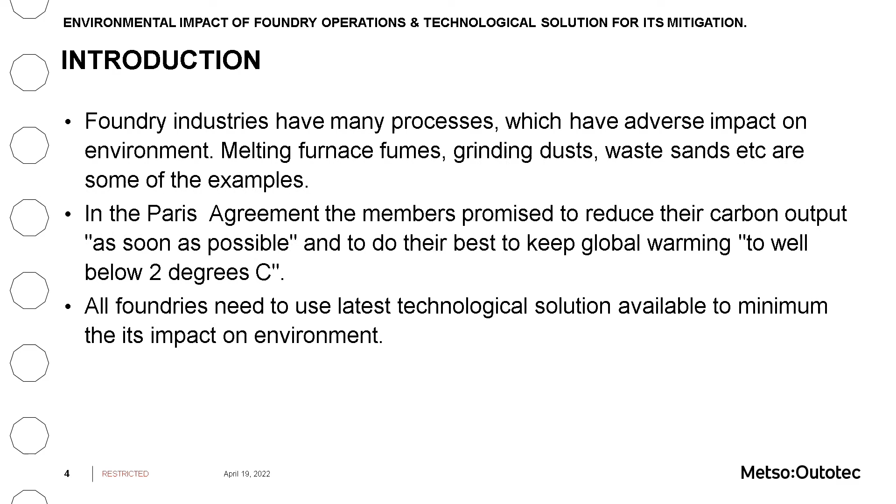So let's start with the introduction. We are all aware that the foundry industry has many processes, starting from pattern making to casting dispatch, and all these processes involve some impact on the environment. For example, melting furnace fumes, grinding dust, as well as when we dump used sand, that creates pollution in the environment. The Paris Agreement was held a few years ago, and during that, all members committed to reduce their carbon output as soon as possible. Apart from that, they also committed to keep global warming well below 2 degrees. So to achieve this target, what the foundry industry can do is use the latest technological solutions available in the market.

So let's start with what are the processes which cause detrimental impact on the environment. One of the processes is molding and core making. In green sand molding, a lot of dust is generated, and in resin bonded processes, a variety of resins and catalysts are used. When we dump that sand, it is harmful for our motherland, so it creates soil pollution.

After the molding process, if we talk about the melting process, we are all aware that this is a very energy intensive process, and a lot of energy is required to melt raw materials and scrap. During the melting process itself, a huge amount of fumes are generated. In addition, before melting, when we do scrap cutting by thermal means, that also creates a tremendous amount of fumes, which need to be captured by some means to avoid contamination to the environment.

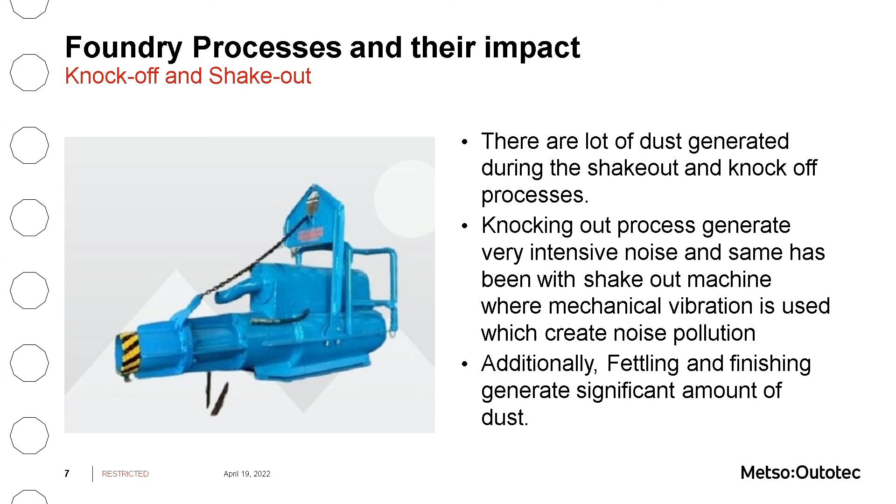Moving forward, knockout and shakeout processes also create lots of dust in the foundry, and we are all aware that the environment at the knockout and shakeout area generates very intensive noise. The same happens with machines where mechanical vibration is used, which also creates noise pollution. Apart from both these processes, the fettling and finishing process also generates a significant amount of dust.

Also, the pneumatic transfer of the sand also creates dust.

If we talk about fumes, obviously the scrap cutting activity as well as the melting activity also generate fumes. Apart from that, when we transfer the mold and pour the casting, fumes are also created. The third one is odor.

It is generated in casting and mold cooling, as well as during sand mixing. During the melting activity and spraying and coating activity, odor is also generated.

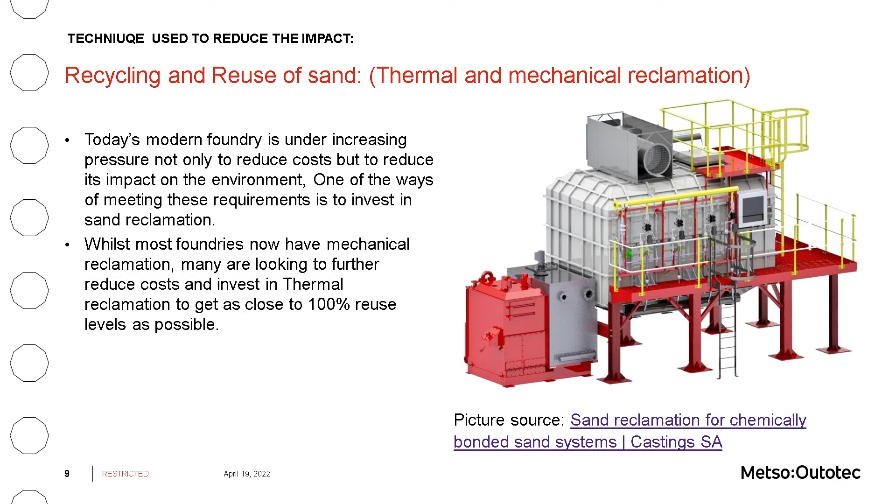When we use sand, first of all is recycling and reuse of the molding sand. In today's modern foundry there is tremendous pressure, not only for reducing cost, but the laws related to environment are getting very strict, and that triggers the foundry to invest in reclamation of the sand.

Nowadays, most foundries have mechanical reclamation, but now foundries can use the thermal reclamation unit to reuse the maximum amount of sand in the foundry, so they can minimize the use of natural resources and reuse it very well.

In the thermal reclamation process of sand, most of the binder and all organic materials are removed by the oxidation process in the chamber. First, the sand coming from the mechanical reclamation plant passes through the cleaning tower, and at that time most of the metallic particles are removed before it enters the thermal reclamation unit.

The thermal reclamation system itself is a fluidized bed design with a gas and air mixture, providing the fluidized medium and igniting the sand bed via gas nozzle. The typical thermal reclamation system uses natural gas or LPG, and it operates at different temperatures depending on the binder used.

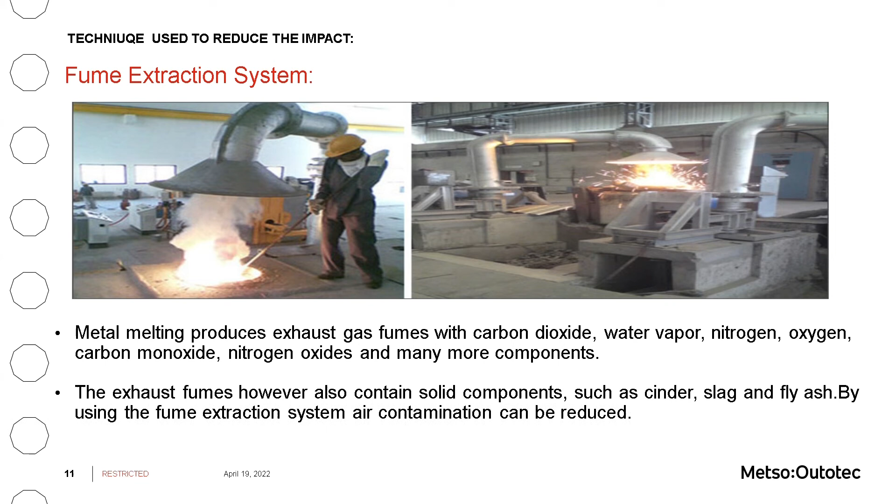Apart from that, very fine particles of solid components are also generated during the melting process itself, and that needs to be captured by any method or technological solution available in the market. So nowadays, most furnaces, if you buy a new furnace, are equipped with a removable lid, and that furnace operates in two modes.

First, when the lid is closed, most of the melting happens at that time, and the furnace operates at minimum exhaust power, with that lid removable. So when that lid is open, the furnace operates at maximum exhaust power, because at that time most of the fumes need to be captured.

Here, on the right hand side, is the picture of the fume extraction system we have installed in our Vadodara foundry.

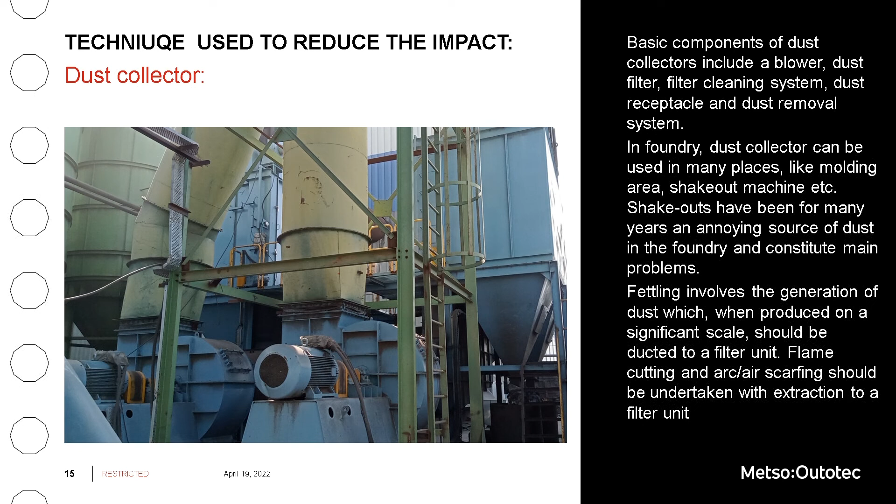In foundries, dust collectors can be used at many places like molding area, reclamation unit, mixer area, shakeout area. We can also put dust collectors at the fettling area for grinding dust control. For fume generation at gouging and welding areas, we can provide fume extraction systems. Portable fume extractors are available in the market, so we can reduce fume as well as dust using this technique.

Another area of concern is water pollution. Many chemical industries as well as foundries generate lots of water effluent, so we can treat our water effluent using two major parts of treatment plant: the effluent treatment plant and sewage treatment plant.

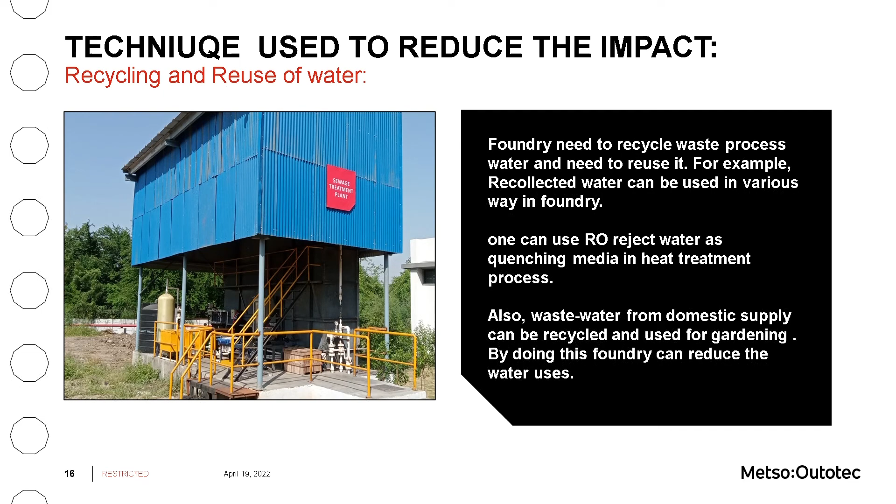At Foundry, we have a zero water pollution policy. We installed an STP sewage treatment plant to reduce and recycle domestic water generated from the canteen, water bath area, and toilet area.

First water is collected at soak pits, and then by gravity it comes to the STP plant, where we have primary, secondary and tertiary treatment. After that, we recycle our water for development of garden and green belt.

We can also use RO reject water, which has high TDS, in our quenching media at the heat treatment process. Also wastewater from domestic supply can be recycled and used for gardening, and by doing this we can reduce water usage as well as pollution.

Many other new technologies are in the market, like energy efficient equipment with latest technology that foundries need to adopt to reduce energy consumption, which will ultimately reduce the impact on environment. For example, there are high efficiency burners available for complete combustion of LPG as well as PNG gases in the heat treatment area. In addition, some foundries use refractory coating on heat treatment furnace lining.

We have also planned to install a 2 megawatt solar system on our production shed. Apart from this, we can use LED lighting instead of normal lighting, which will also reduce our energy consumption, and indirectly contribute to minimizing the CO2 emissions generated at various power plants and in the electrical sector.

Apart from this, we commonly use the concept of rainwater harvesting to limit water usage.

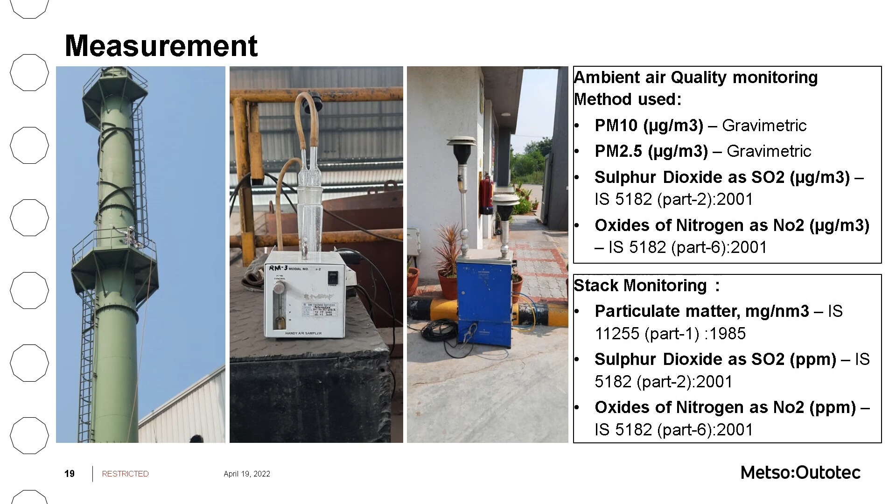We installed various technologies, but if we cannot measure the pollution factors, we cannot minimize the pollution source. So at Metso Outotec, we monitor ambient air quality, following methods for PM10, PM2.5, sulfur dioxide, and oxides of nitrogen.

At stack monitoring, we also monitor particulate matter, sulfur dioxide, and oxides of nitrogen. Also for the sewage treatment plant, which we use for the gardening area, we have to monitor biological oxygen demand, total suspended solids, pH, and residual chlorine to minimize the environmental impact on ground as well as biota.

Workplace monitoring is also done, in which we monitor total dust, sulfur dioxide, and nitrous oxide. Drinking water as well as noise monitoring are also done as per this standard.

Mr. Darshan, last 2-3 minutes. Yes, sir, so we can conclude that...

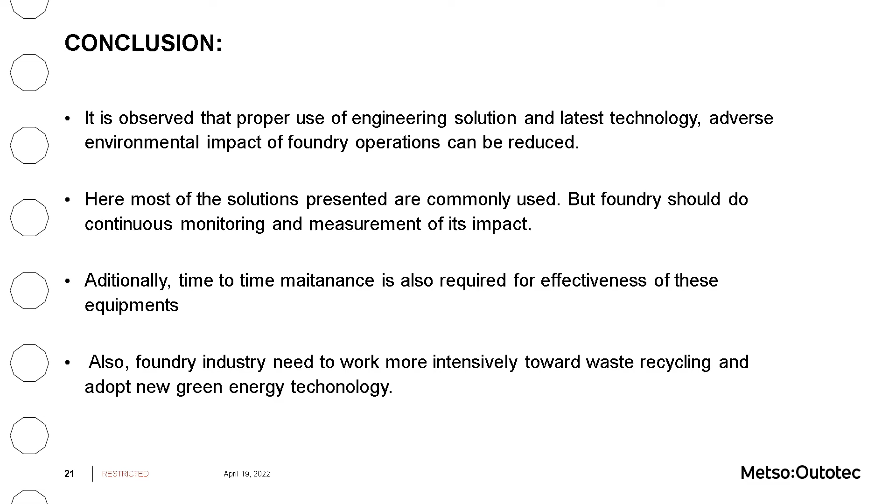It is observed that with proper use of engineering solutions and the latest technology, adverse environmental impact of foundry operations can be reduced. Most of the solutions presented here are very commonly used in almost all new foundries, but foundries should do continuous monitoring and measurement to reduce their impact on the environment.

Additionally, time-to-time maintenance and preventive maintenance is required for effectiveness of this equipment and technology. Also, the foundry industry needs to work more intensively towards waste recycling and adopt new green energy technology like solar panels. Thank you very much.

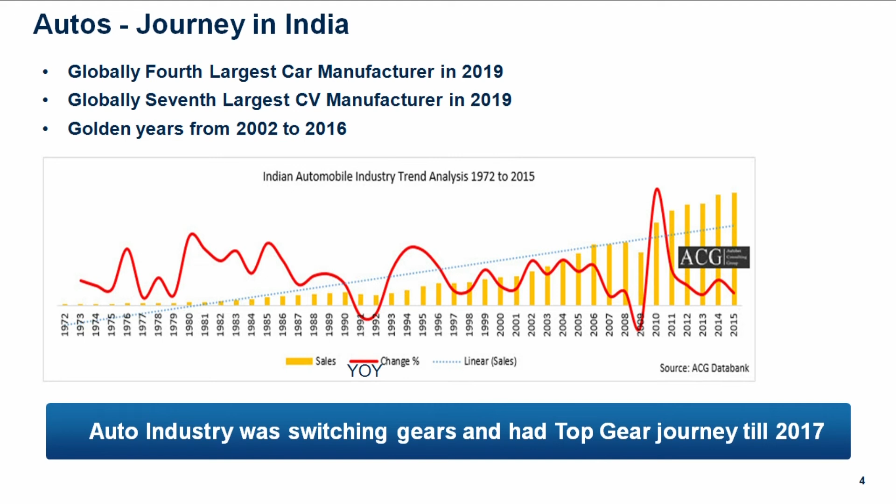This is very interesting. Auto industry has seen ups and downs since it started. But 2016 and 2017, we had a golden era where you see upscales. And if you look at the linear sales, the industry is progressing in a positive direction. Research from Counterpoint suggests we had a CAGR low, but if you look at the third best year in 2021, after 16 and 19 was 21, over 3 million units of passenger vehicles were sold. So again, a great future ahead.

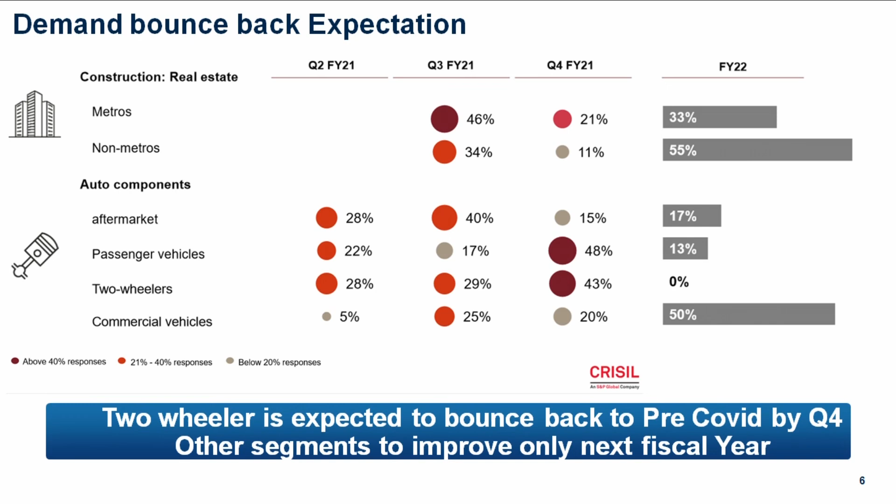This is from CRISIL. The way you read this chart is, this was a survey done on what is the customer expectation and what do they think about demand bouncing back, and this was done back around a year back. So for construction and real estate, the circle indicates 40%, the dark red indicates above 40% of responses saying that, 46%, that demand will bounce back. 21% to 40% of responses say Q4 2021 it will bounce back, and 33% said it will bounce back in 2022.

Look carefully at the auto components, commercial vehicles, 50% demand will bounce back in 2022, and passenger vehicles, financial year 2021, 48%. And we saw that 3 million vehicles sold, right? So the remaining 30% will grow. Two-wheeler industry had a great turnaround in 2021.

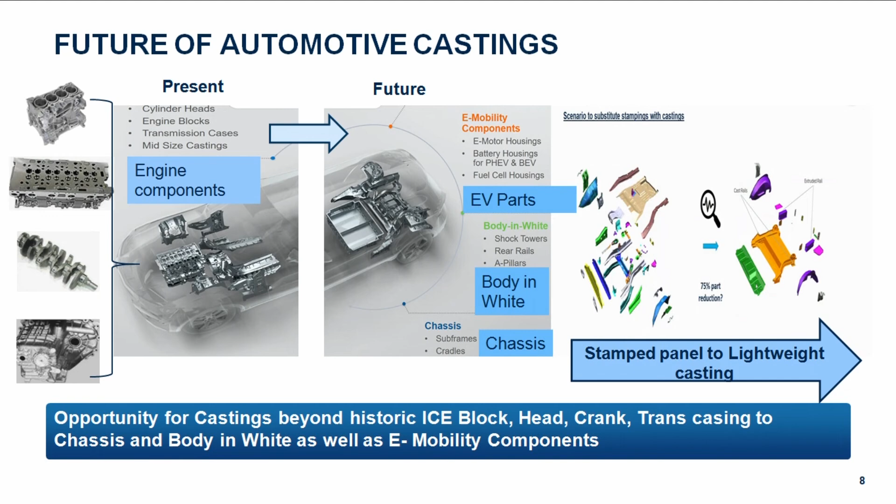What's the future? Casting industry for automobile, when one speaks, it's about 4 components historically: head, block, crank, and gear case housing. But from present to future, if you look at electrical vehicles, there's a significant increase in aluminum die casting, high precision aluminum die casting. It includes e-motor housing, battery housing for plug-in hybrid and battery electrical vehicles, and fuel cell housings. Interestingly, a lot of body components where we currently see sheet metal are also getting changed to complete aluminum die casting. So in body-in-white, the shock absorber mountings, the rear rails, A-pillars - from the driver's seat, left and right A-pillar, B-pillar and C-pillar - the full subframes and the cradles where batteries and the trans casing are mounted are also getting developed towards lightweight casting. And this is a significant step change from where the casting industry is, to get ready for the future. Because a lot of talks are about, if internal combustion engines get phased out, what's the future of casting? But this is the future.

Some examples of high precision aluminum die castings: the right-hand side picture is about the front cross member, where the powertrain component sits, and the shock absorber tower, and the rails. These are all built with aluminum die casting. So you don't have to manage complexity, don't have to manage welding parameters, etc. And it is lightweight, which improves the emission as well as the strength to weight ratio and fuel efficiencies.

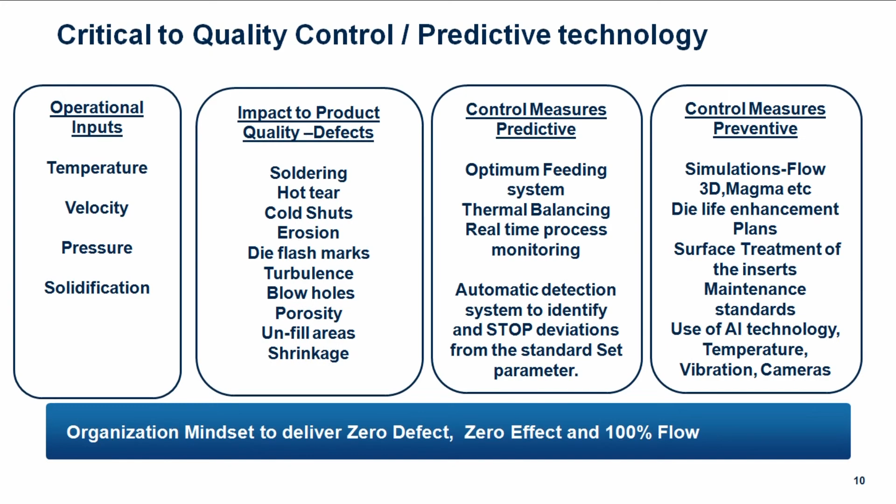To deliver this, what are the critical to quality parameters? If you look at input in the foundry industry, temperature, velocity, pressure, and solidification - these are the critical input parameters. When we talk about SIPOC, it's all about how you measure your input so that your output is predicted, good or bad. And when bad is predicted, we correct so the customer doesn't get bad quality. If it is not managed well, it impacts product quality - defects like hot tears, cold shuts, these are all foundry terms, so I'm not getting into detail. And it costs a lot to the foundry as well as the OEM. Control measures we can put in place are feeding systems, thermal balancing, real-time process monitoring, AI technologies, and automatic detection of process parameters. So if anything goes wrong outside the control limit, the process stops producing bad quality parts.

What can be done at pre-advanced stages is simulation, flow analysis, Magma, some die enhancement, surface treatment, AI cameras, vibration monitoring, heat temperature monitoring, etc. When things go wrong, it's a major cost to the company, including OEM as well as the foundry, and it causes recalls, bad brand image, etc. So if we have to get out of this, I think the way is to focus on input and have a very solid quality process control.

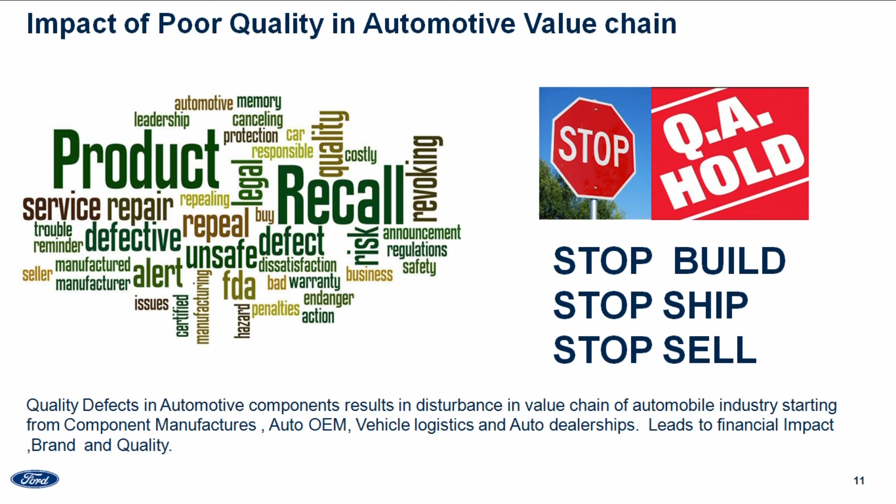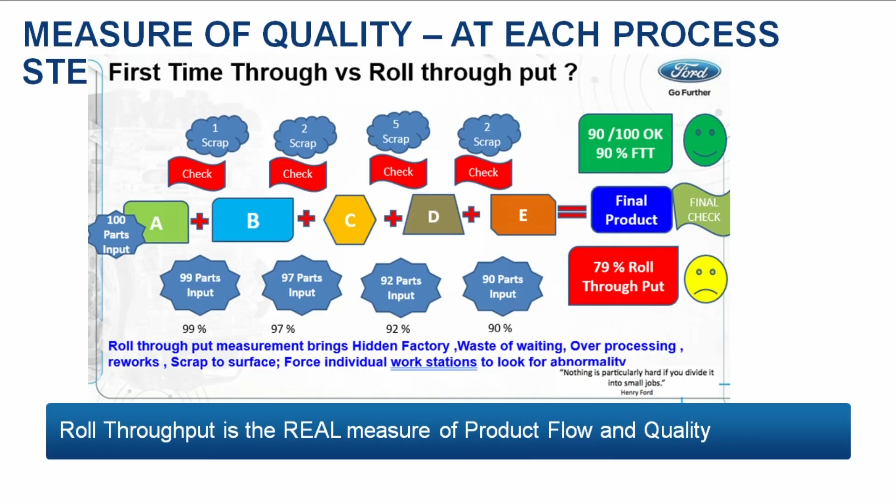If you look at the top, in a casting process you have step A, step B, step C, step D. If you have a good check on what you're putting in and what you're getting out, and then do roll throughput, that's the real measure.

Rather than putting in 100 parts and getting 90 parts out and calling it 90% FTT—that's not the case. For the same process, if you apply roll throughput, it will be 79%, because you're spending energy, labor, everything to process it, and whatever is in-process rejection is cost and waste.

So this is where you may want to rethink how you measure quality in your processes. With that, I would like to conclude, and thanks to the IFC 2020 team for giving me this opportunity to share my thoughts about future trends in industries and expectations from foundries. Thanks very much. Namaste.

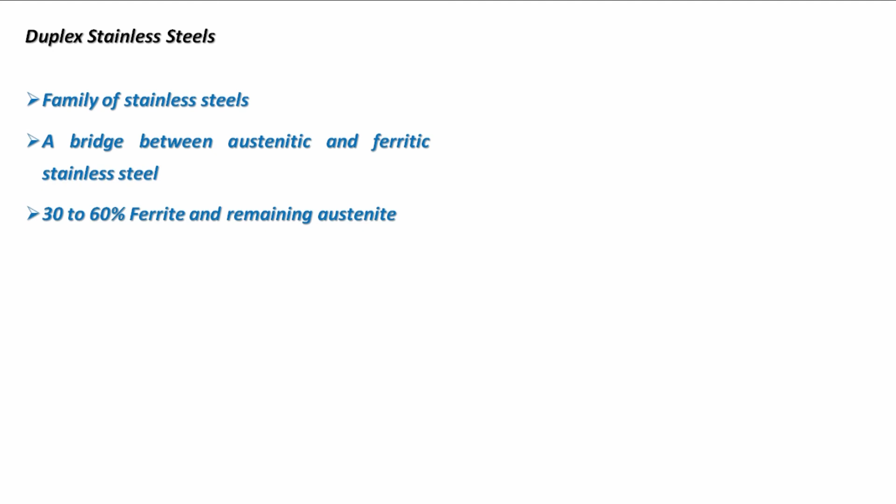So basically duplex stainless steel is a family of stainless steel. It is a bridge between austenitic stainless steel and ferritic stainless steel. This material basically contains 30 to 60% ferrite phase and the remainder austenite. It has excellent corrosion resistance for stress corrosion cracking due to the presence of ferrite. However, the same ferrite makes the material susceptible to hydrogen-induced cracking. So this material is particularly restricted beyond application at 350 degrees Celsius because of the formation of various secondary phases, which we will see in the upcoming slides.

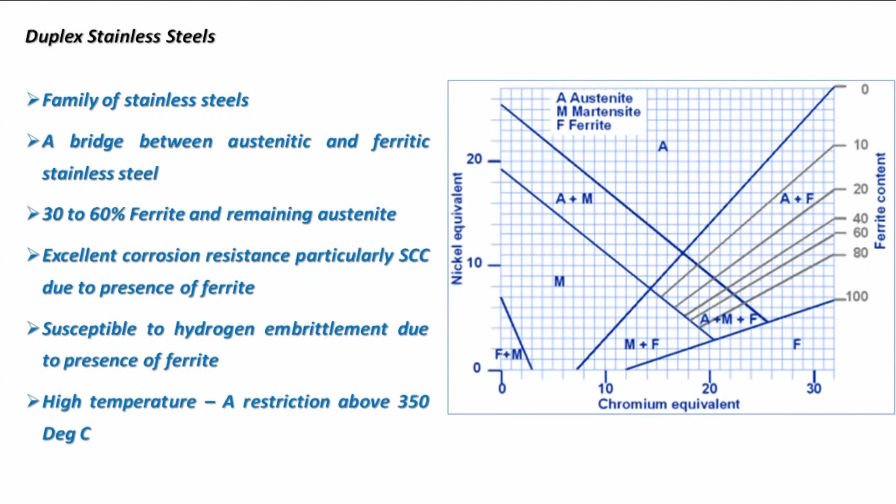Here we can see a graph showing different kinds of stainless steels that we produce. At the top we have austenitic stainless steels, mentioned as A, and in the bottom right column we have F, which are ferritic stainless steels. We can see the ferrite content A plus F at the right corner, which indicates the percentage of austenite and ferrite, where duplex stainless steel belongs.

The solidification of duplex stainless steel is a typical solidification, entirely different from all other steel materials, including carbon steel or stainless steel, even austenitic and ferritic stainless steel, because in this case solidification starts with the ferrite phase followed by austenite transformation below 1000 degrees Celsius. The advantage of duplex stainless steel is the addition of nitrogen, which promotes the nucleation and growth of the austenite phase at high temperature. During solidification, various phases form, unlike in austenitic and ferritic stainless steels, such as nitrides, carbides, and lots of intermetallics. This is the solidification pattern of a normal stainless steel based on the chromium and nickel equivalent, as we know.

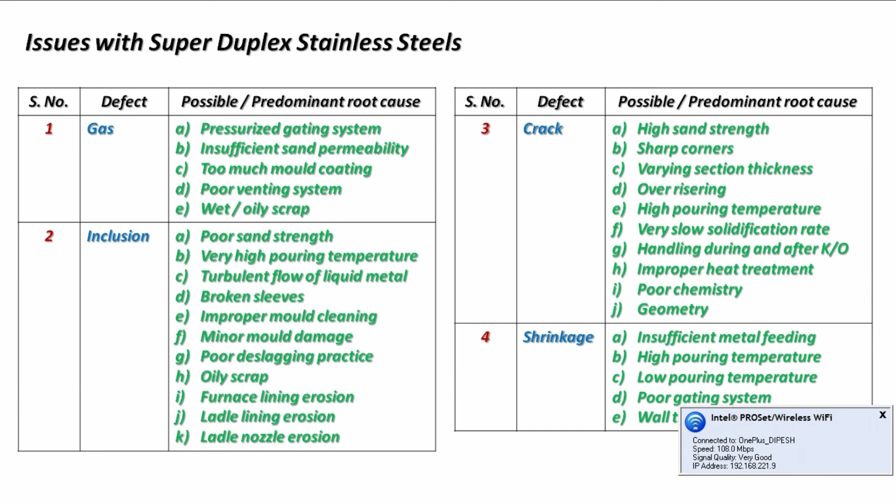So the main issues that a foundry faces with super duplex stainless steel are these four: gas, inclusions, crack and shrinkage. These are some of the root causes that we have identified particular to duplex stainless steel.

But the major problem with duplex stainless steel is cracking. The root cause of cracking is generally known to be sigma phase. So is sigma really a problem? Yes, sigma is really a problem. But we have to think, is sigma really the only problem beyond the crack tendency? It is not. So is there any other source that forms cracking in super duplex stainless steel?

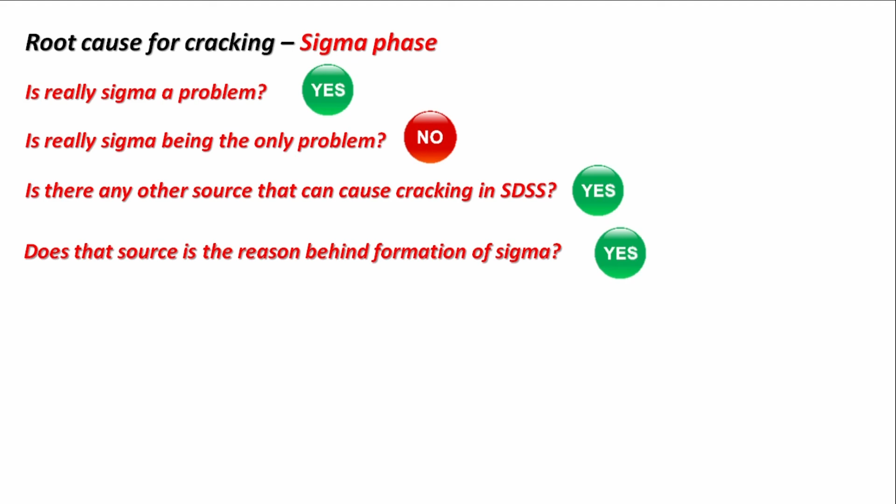Yes, we have a number of reasons. Are these reasons that lay behind the formation of sigma phase? Definitely yes. So what is the real fact behind sigma and its byproduct, crack? It is chemistry designing. So basically we have to start from the chemistry designing for duplex stainless steel to control cracking.

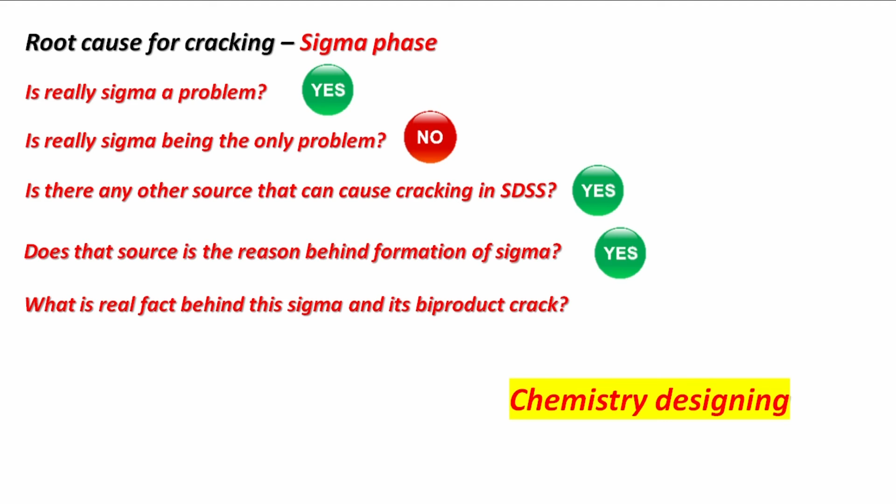So basically we all know this duplex stainless steel is susceptible to sigma cracking, but that is not the full fact. Sigma phase is one phase that forms at high temperature, but we also have another phase forming at 475 degrees Celsius, called alpha prime phase, which during steel foundry repair welding or gouging operations, we expose the material to heat. Whenever the material is exposed to 400 degrees Celsius and above, there is a chance for formation of alpha prime phase, which creates 475 embrittlement in the material, and at high temperature we will have sigma phase cracking.

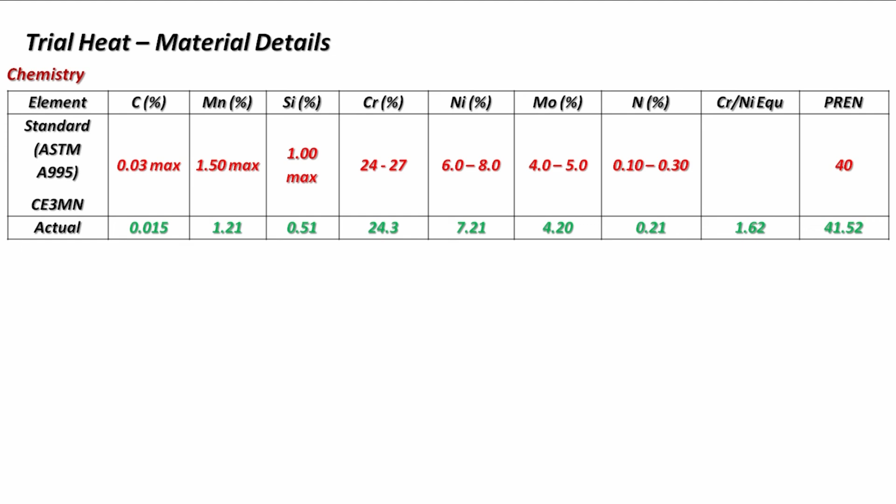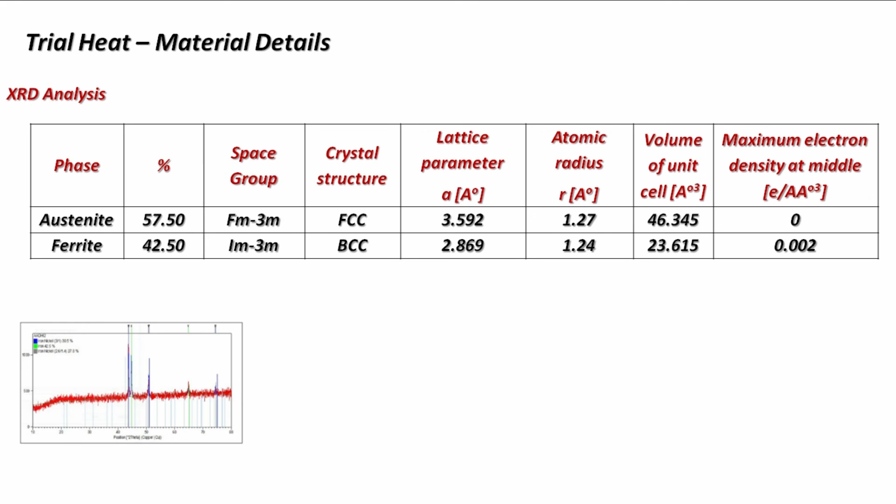Further, this solution annealed material is subjected to XRD analysis to understand the basic characteristic of the material, and we can see austenite is around 57.5%, ferrite is around 42.5%. The crystal structure of the material is clearly displayed: austenite has a face-centered cubic system and ferrite has a body-centered cubic system.

So now let us try to understand what is 475 embrittlement and what is sigma phase embrittlement.

So when my material is further heated above 350 degrees Celsius, what happens? This metastable alpha phase starts transforming into its stable phase of alpha and alpha dash.

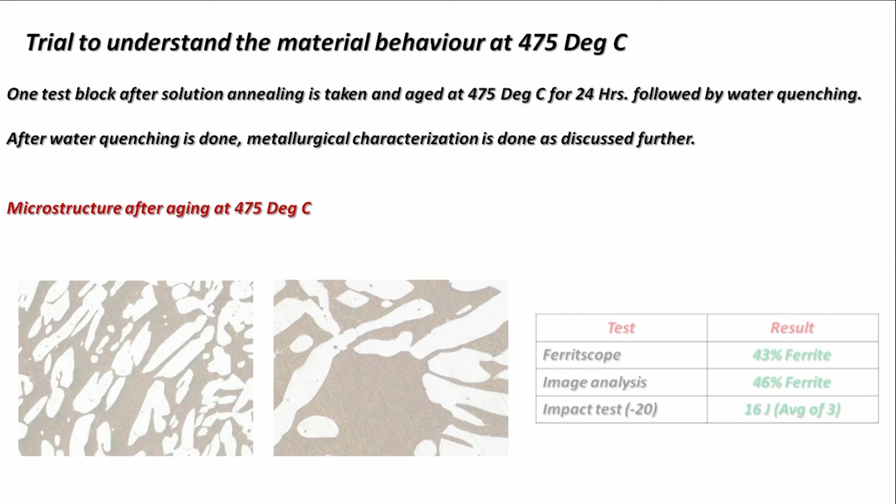To understand this, first we took one of the test blocks and heat treated it at 475 degrees Celsius for 24 hours, and some metallurgical characterizations were done. But in metallurgical characterization, in metallography, we find no difference in the microstructure. There is no differentiation of alpha and alpha prime because it is difficult to segregate the material at microscope level.

So further characterization is required, but Ferritscope however shows 43% of ferrite. We have two phases, but it is still showing 43% ferrite. Why? Because both alpha and alpha prime are magnetic phases, so we cannot segregate them through Ferritscope also.

However, if we see the impact toughness of the material in solution annealed condition, the impact toughness is around 164 joules. But after exposing to 475 degrees Celsius, we can see a great fall in the impact toughness to 16 joules, which is nearly 10 times drop, indicating the material has become brittle.

Now further we took some other test blocks and heat treated them at various temperatures like 400, 475 and 500 degrees Celsius, and tested for hardness and impact toughness, where we can see the hardness of the material at 475 degrees Celsius drastically increases, indicating the material forms this alpha prime phase at 475 degrees Celsius with the highest kinetics.

However, if we see the impact toughness, it falls suddenly to 26 joules from 160 joules. Whereas at 400 degrees Celsius, we can see a linear drop in the impact toughness.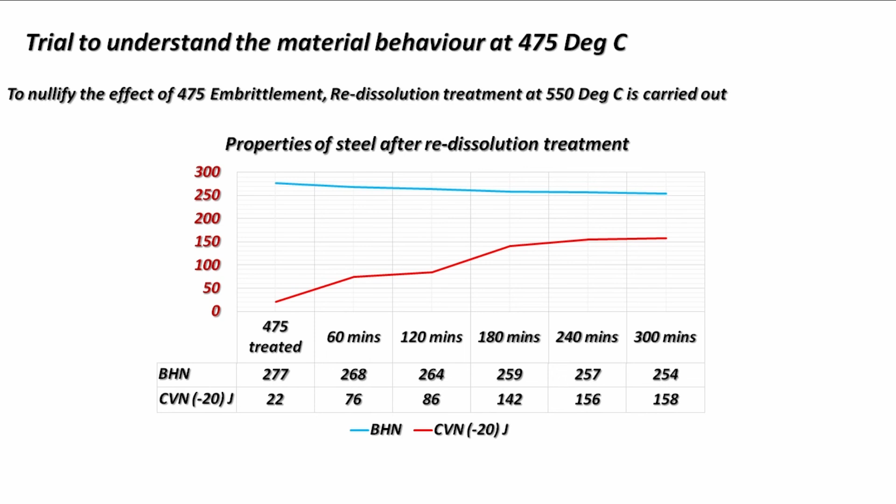So to nullify the effect of 475 embrittlement between 500 and 600 degrees Celsius, we carried out redissolution treatment at 550 degrees Celsius. You can see there is a gradual recovery in the impact toughness of the material from 22 joules to 158 joules.

So this is the concept of 475 embrittlement and redissolution treatment. That is one of the solutions to overcome the 475 embrittlement.

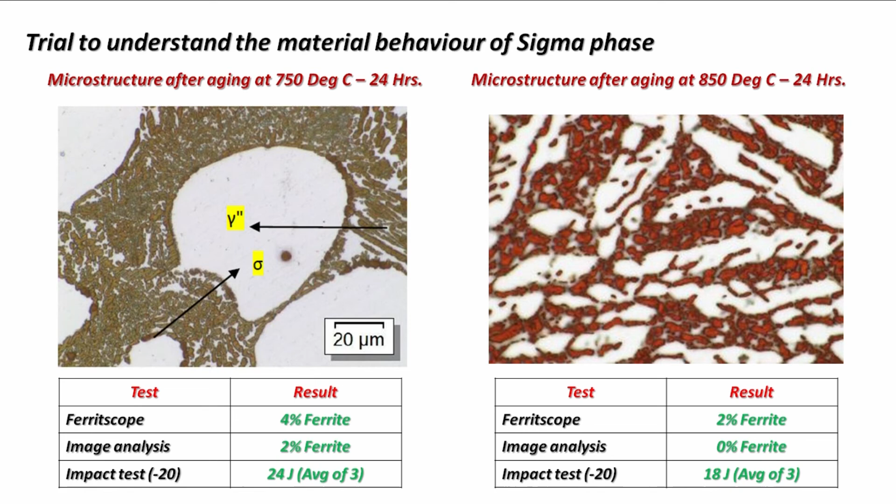So further we did some XRD analysis and understood that at 750 degrees Celsius, the secondary phase that forms is actually not sigma phase, it is actually chi phase, which has a BCC crystal structure. Whereas at 850 degrees Celsius, the secondary phase formed has a tetragonal structure, which is sigma phase.

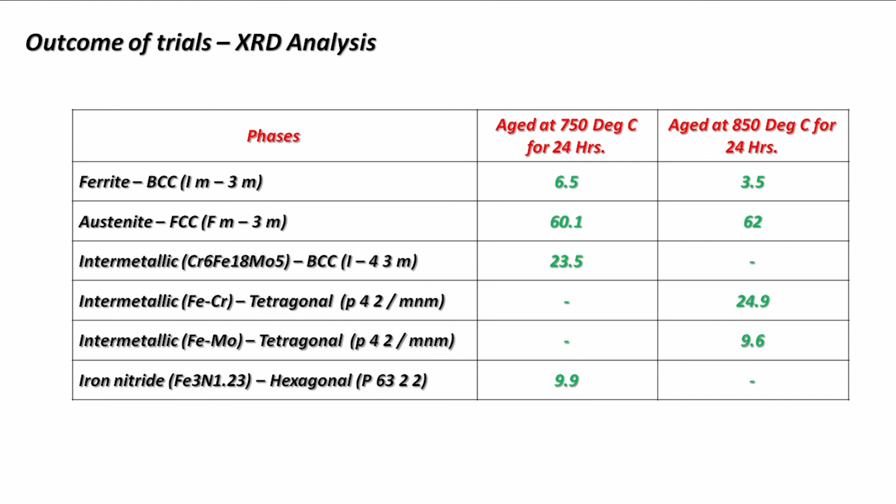So it is very important for us to understand that two phases are forming in duplex stainless steel, which is chi phase and sigma phase, which increases the brittleness of the material, reduces the toughness, and produces crack.

So we can see this is the ferrite and austenite which we earlier saw. And you can see iron chrome moly intermetallic, which is BCC crystal structure, which is chi phase, and some iron nitrides are forming at 750 degrees Celsius.

And at 850 degrees Celsius, the secondary phase formed is tetragonal crystal structure, which is sigma phase. So we can see there are sublattice points of sigma phase.

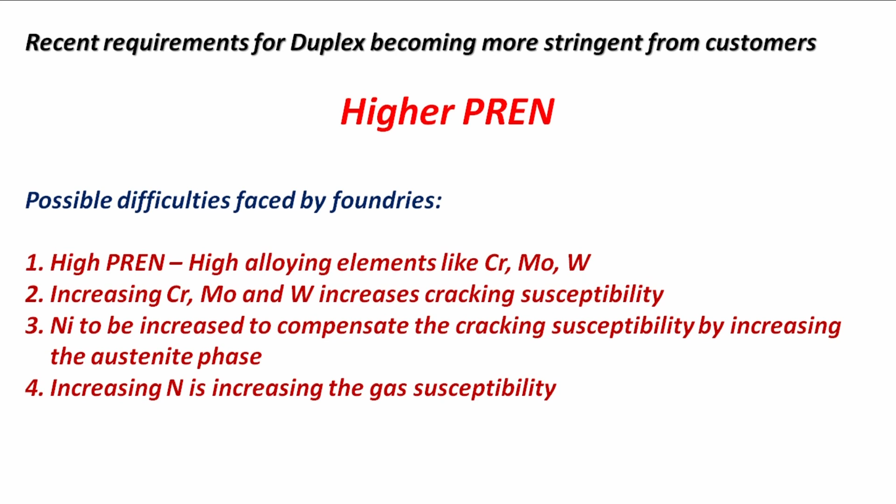Now from customers, we are getting a lot of stringent requirements with higher PREN. The possible difficulty we face is higher PREN means high alloying elements like chrome, moly, and tungsten. So chrome, moly, tungsten, what it does is it increases the cracking susceptibility of the material.

But really, is PREN a problem? Yes, and sometimes no. So we have to understand when PREN is a problem. PREN is a problem because of the alloying elements that we add to meet the PREN number.

So why alloying elements? Because the elements we add, chrome, moly, and tungsten, increase the ferrite phase, which subsequently increases the sigma phase, which is hard and brittle.

So when cracking happens, it happens at solidification, casting, handling, and heat treatment, and it occurs at corners, section thickness variation zones, thin wall section zones, and under risers.

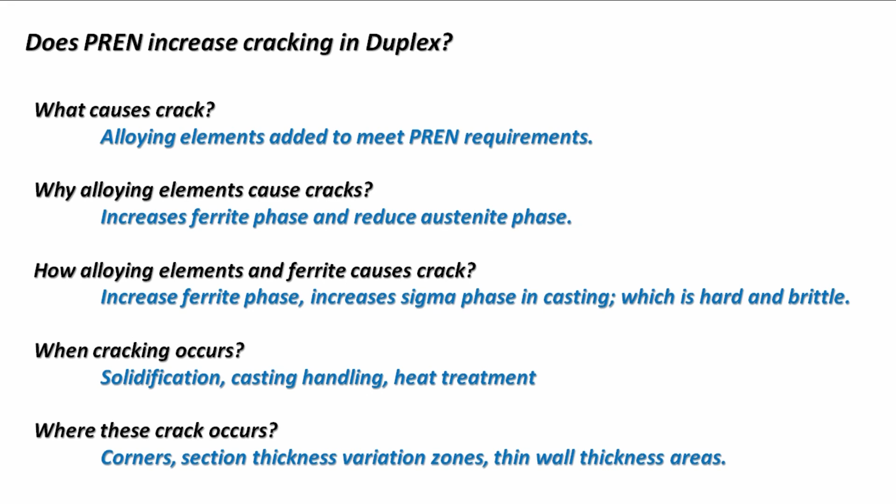So when is PREN not really a problem? When we restrict the addition of ferrite stabilizers, keeping it limited to control the ferrite. So controlling the ferrite controls the sigma, and drastically we can also reduce the brittleness of the material.

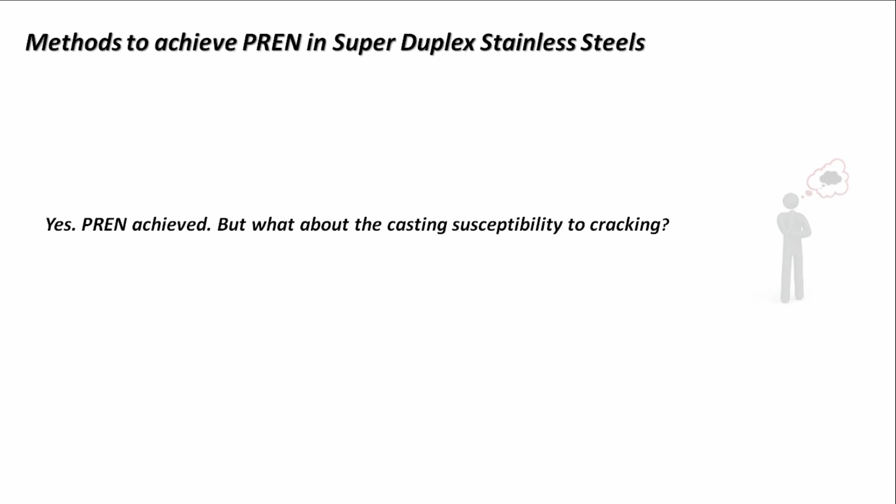So methods to achieve PREN: first we think about addition of chrome and moly because it is easy to add. Yes, it is a good idea, PREN is achieved, but the susceptibility of cracking increases. So what do we have to do?

Should I increase the nickel to increase the austenite phase? Yes, it is a good idea, but the production cost with the current scenario is not possible, and this is where we have to exercise control.

So to understand better, we did some prototyping of a simple disc in our foundry. You can see the left side is a grade 5A disc made with PREN number 42.33, and the material has a crack under the riser where the ferrite is around 54 to 57%.

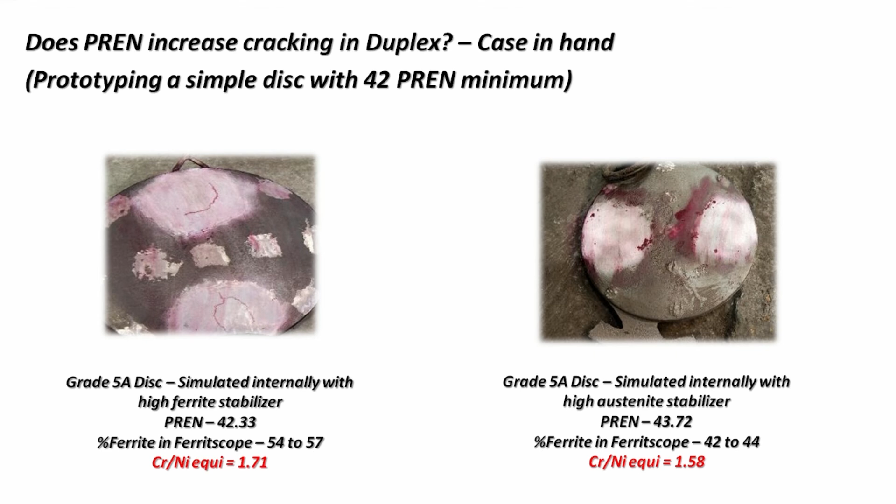On the right you can see the disc which is made of 5A with PREN number 43.72, but the ferrite we achieved is 42 to 44%. So it is better - it is up to us to control the ferrite by monitoring the chemistry of the material.

So the other parameter I can control is the heat treatment parameters by optimizing the temperature, time, cooling media, and heating parameters.

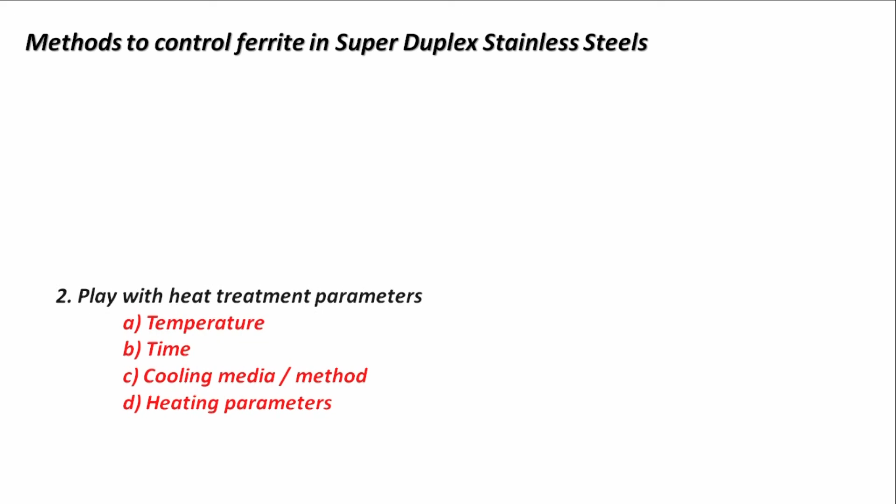So process and results vary for foundries depending on their production process and methodology. So it is very important for us to understand our process, our methodology, and how we process the material, and to find the solution out of this.

And one more thing I feel I should tell everyone is, if we treat the material as a living being, it will definitely react back to us.

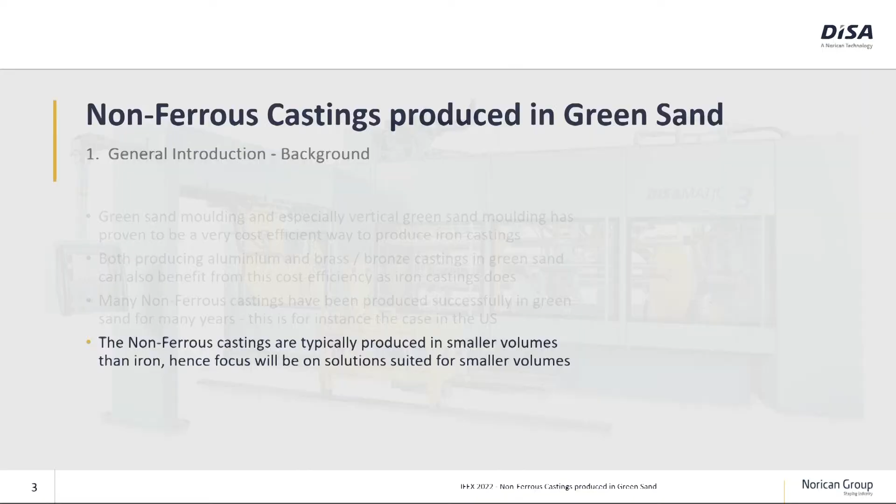In general, these non-ferrous castings, meaning aluminum castings and brass and bronze castings, are normally not made in very high volumes. Hence we will try to focus today on solutions that are more suitable for producing castings in smaller volumes.

If we look at producing non-ferrous castings in sand molds, there are a lot of benefits, of course depending on which process the castings were produced in before. So the list of benefits I will show you today can be seen more as general benefits covering most of the different processes, but of course it will be specific due to the specific process that we have converted into a green sand casting.

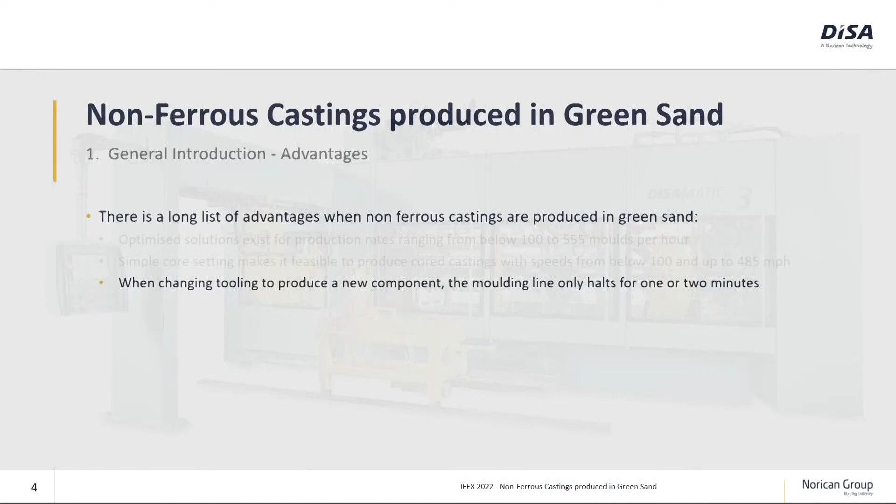First of all, when we talk about green sand molding, we have this very high efficiency that is hardly found in any other process. Then we have a very simple and efficient core setting that means we can produce castings still at a high rate even though they are cored. Then we have the chance to change tooling, meaning pattern plates, very fast - when we want to produce another part in the green sand process, we only need 1 or 2 minutes, then we are ready to produce the next casting.

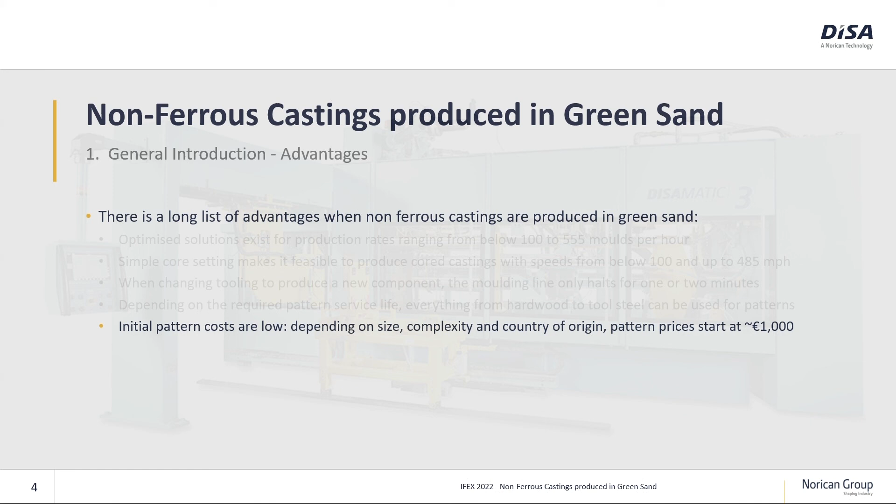Depending on the need for service life of the pattern, we can choose many different materials, from hardwood to tool steel patterns, depending on what tool life is needed. This means the costs for tooling can be kept very low and in proportion to what is needed. If we only have to run short series, we can produce the patterns in hardwood. If we need to run extremely long series, we can produce the patterns in tool steel.

These pattern plate lives can be very high, as high as 500,000 or even more if we go for tool steel. This means at even very high production volumes, we only need one set of production patterns. We don't need a number of toolings to be able to make the production.

Furthermore, the pattern maintenance will be very low compared to other processes from which these castings are normally moved. We do not have to repair weld on a die every 5,000 to 10,000 shots or something like that. We can use the patterns for hundreds and hundreds of thousands of molds if we produce them in the right material.

Furthermore, as the tooling normally is quite simple, the lead time from a 3D CAD model to the first prototype can be very short, and of course the lead time to the start of production can be very short too.

If we need to do modifications, optimize the gating systems or feeders, it's also very easily done on a pattern for green sand molding.

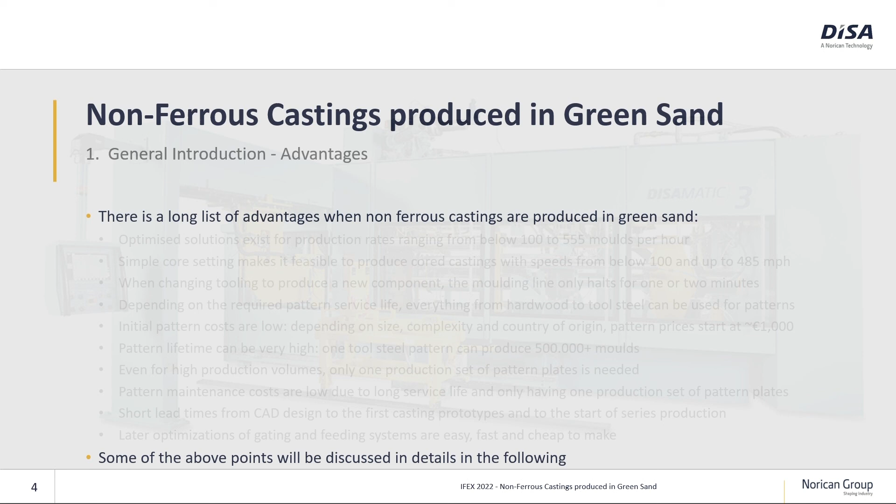So some of these points will be discussed in this presentation. Unfortunately, the time is a little short, so we will only highlight some of the features.

Moving on to molding and sand plant. If we are going to produce aluminum or brass and bronze castings in green sand, the molding machine will be exactly the same. This means we have a proven and very efficient technology available.

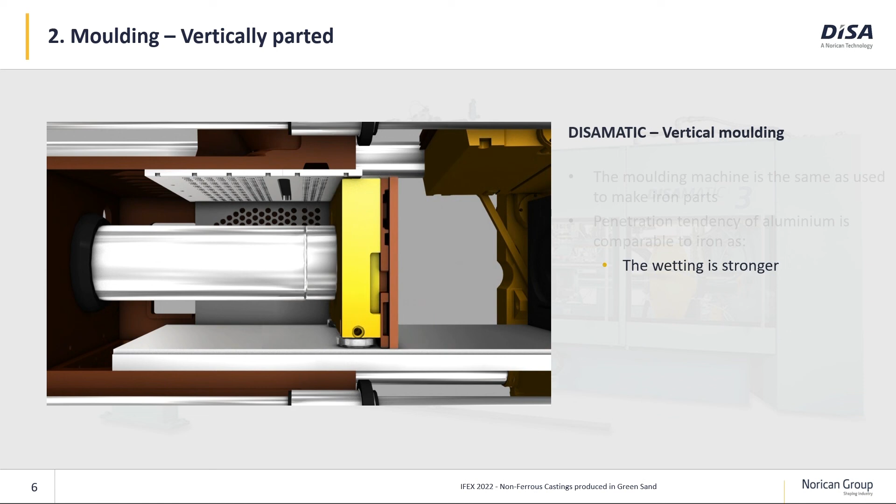If we look at aluminium, we will see that the tendency of penetration will be more or less the same as for iron. This is because the wetting is much stronger for aluminum, but on the other hand, the density of aluminum is much less. So at the end of the day, we will have more or less the same tendency to penetration of aluminum as we have for iron.

This means we can get very good surface qualities of castings coming from green sand molds, even though we use sand as molding material.

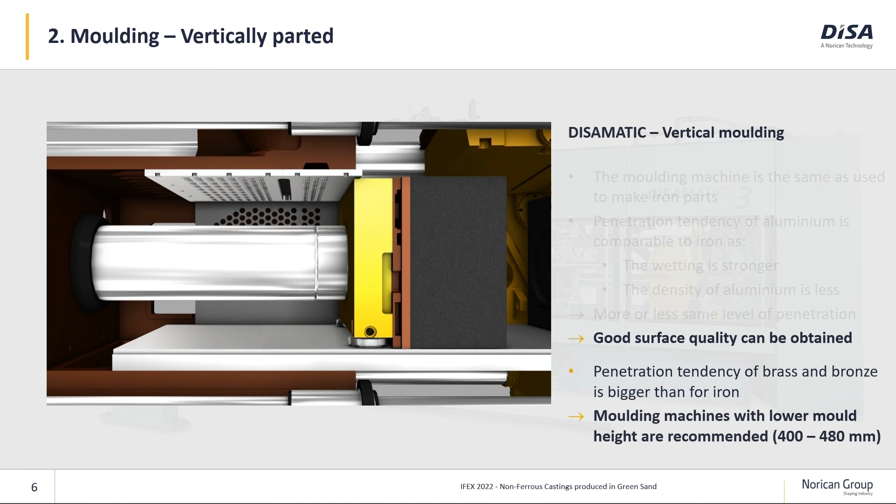If we look at brass and bronze, we will see that the tendency to get penetration is quite a lot bigger than for iron. To mitigate that, we normally recommend molds with lower heights, let's say 400 to 480 millimeters, to have a lower risk of getting penetration on the castings.

If we look at the molding sand we use for aluminum and brass and bronze, we use quartz in both cases, and as with iron, we use bentonite and water to bond the mold. Properties for the molding sand will be similar to the molding sands used for iron. Typically, we are not using coal dust when we produce aluminum and brass and bronze.

Properties of the molding sand will of course have to be adjusted a little bit to the actual application, meaning are we pouring aluminum or are we pouring brass? In case we are pouring aluminum, we will try to keep moisture a little bit on the low side to reduce the risk of hydrogen pickup. Are we talking about brass and bronze? We will try to keep the grain size at a lower level to reduce the risk of penetration.

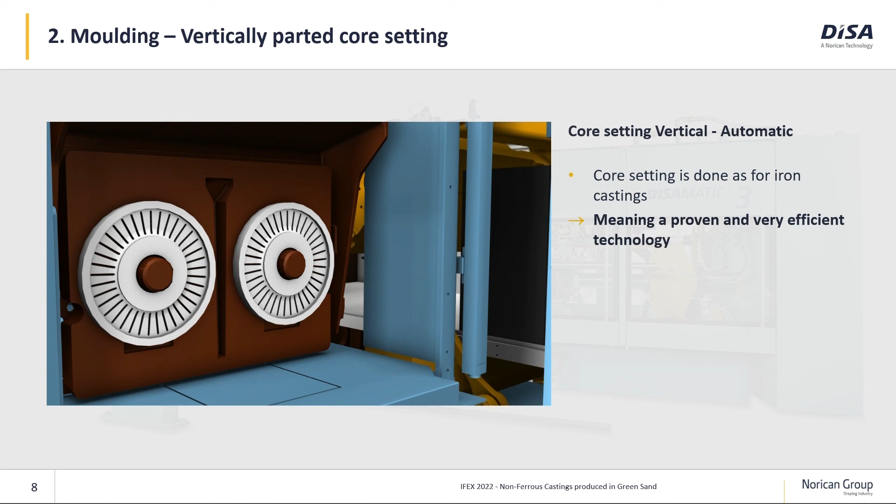Core setting will be done in the same way as you know from iron foundries, meaning we have a proven and very, very efficient process. So running cored castings is actually one of the places where moving to green sand will give you the best benefits.

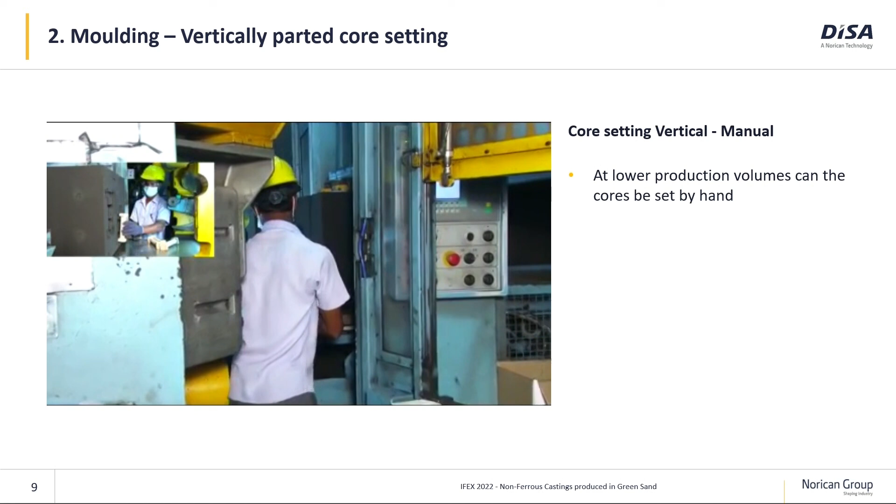If we talk about aluminum castings and brass and bronze castings, we typically talk about lower volumes. This means it can also make sense to do core setting by hand. Doing core setting by hand, we can also set very, very complex cores. We can use nails for fixing the cores in the molds, etc. We can also set non-glued core packages if we would like to do that.

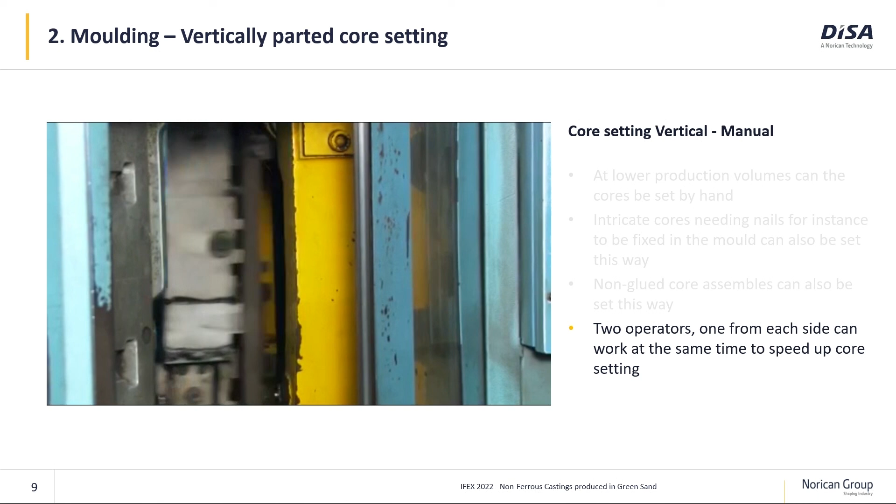We can even use two operators, one from each side of the machine, to speed up the setting of the cores into the mold. So with this setup, even though we use manual core setting, we can easily run 100 molds per hour without too big problems.

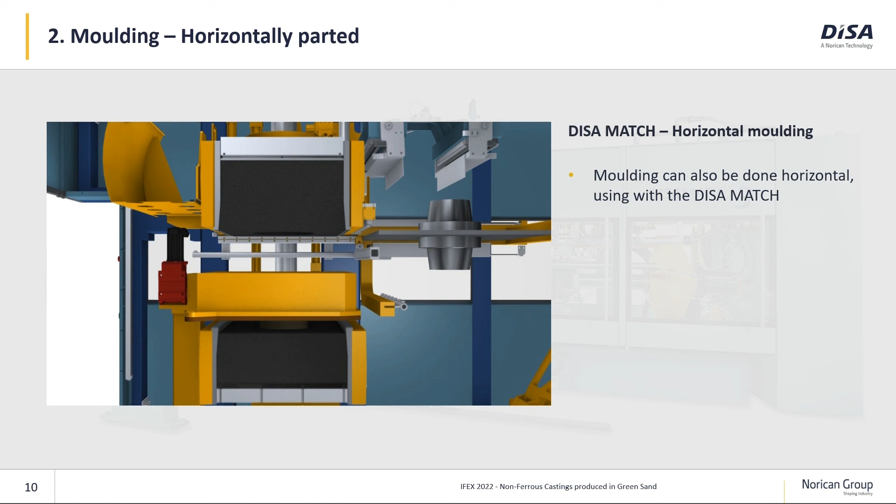We can of course also run the molds horizontal and use a match plate machine to produce the molds. And again here, as we saw for the vertical molding, we will use proven technology being used for iron for many, many years.

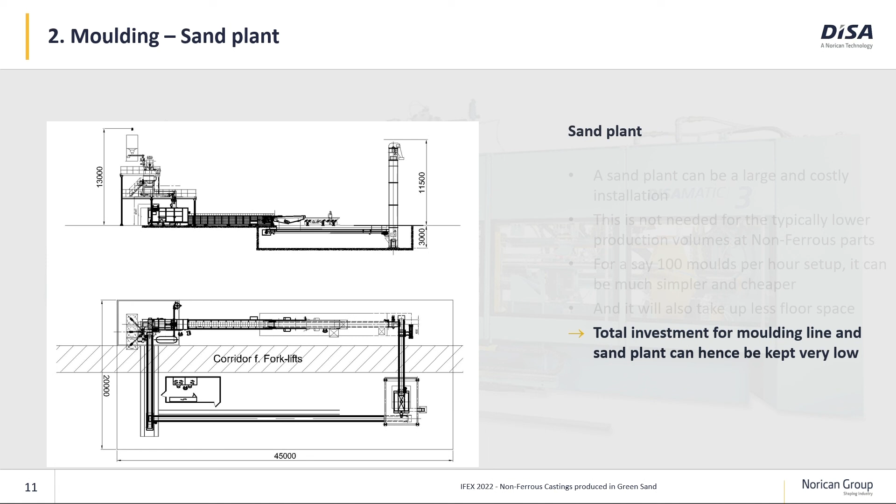If we look at the sand plants, typically you will see a sand plant as quite a big and costly installation. But are we talking about smaller production volumes? We don't need to go for these big and costly installations. For say 100 molds per hour setup, we can use a much simpler and cheaper installation. Here we see an example of a simple sand plant suitable for around 100 molds per hour. This also means less floor space, and what is even more important, that total investment will be much smaller both for the sand plant and for the molding machine. So it will match this smaller production capacity.

Molding, especially when we talk about vertical green sand molding, people normally think 300, 400, even 500 molds per hour. But when we talk about modern green sand molding, we now have available solutions that both fit these huge volumes normally produced in green sand and also smaller volumes which are relevant for non-iron castings.

Here we see a list of some of the available molding machines. We have the D3, one of our high runners with up to 555 molds per hour. Then we have a new group of molding lines with the C line, a vertical molding line, with speeds from 150 molds per hour and up. There are also new and smaller match plate machines available, which suit very well the smaller production volumes normally seen at these non-ferrous castings, meaning both aluminum castings and brass and bronze castings. So we can say that now we have modern and affordable molding equipment available that also suits these smaller production volumes, and of course the investment will follow this.

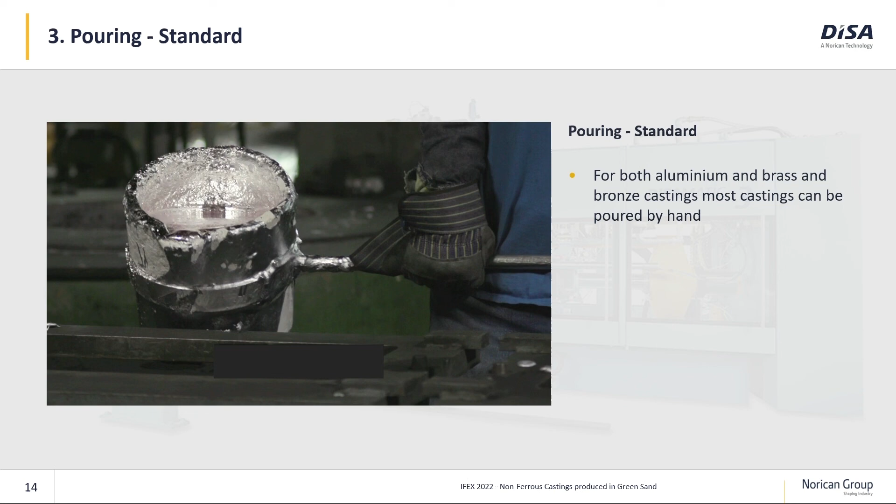Okay, let's move on to pouring. For most aluminum castings and brass and bronze castings, hand pouring is a good choice. It's a simple and very flexible way to pour the mold, and most of these castings can easily be poured this way, and it matches very well the smaller production volumes normally seen for these castings.

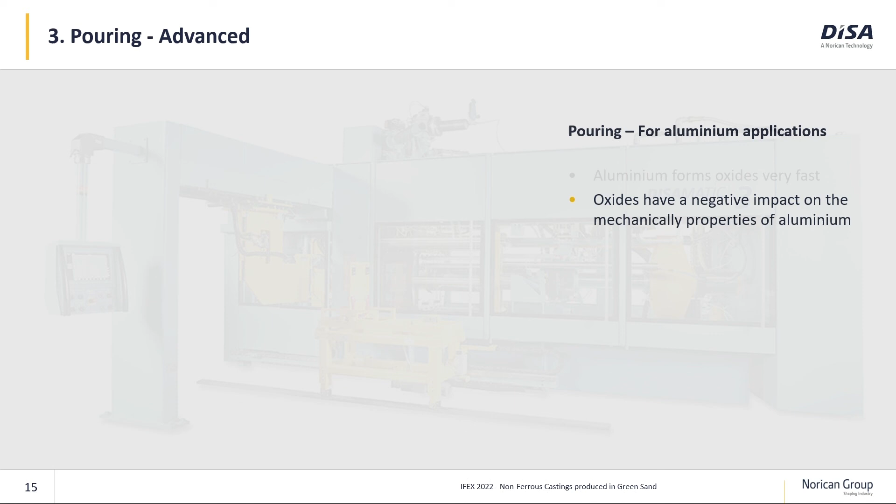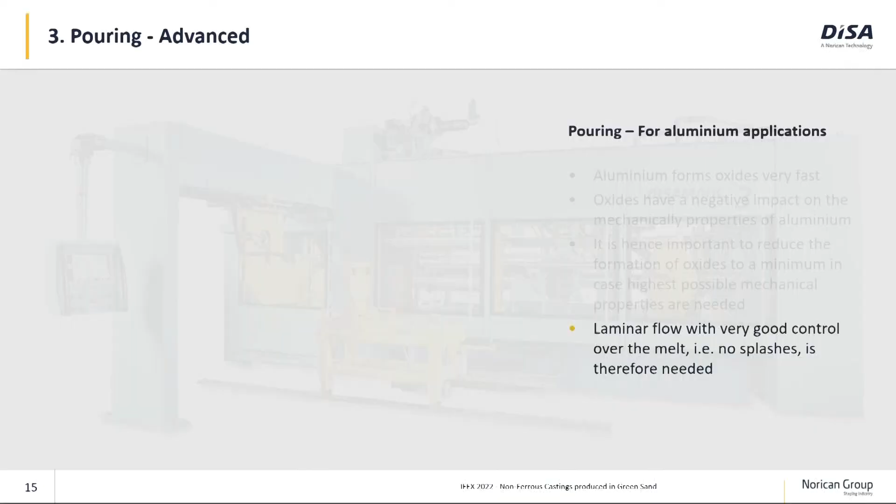Are we talking about aluminum? Sometimes it's a little different. Aluminum forms oxides very fast, and these oxides will reduce the mechanical properties. In case we are producing aluminum castings where we need to obtain the highest possible mechanical properties, it is super important to reduce the formation of oxides to an absolute minimum. This means we need to have a laminar flow and avoid splashes of the metal, etc. We obtain this by using low pressure pouring, where we fill the metal through the side of the mold and slowly fill the metal into the mold.

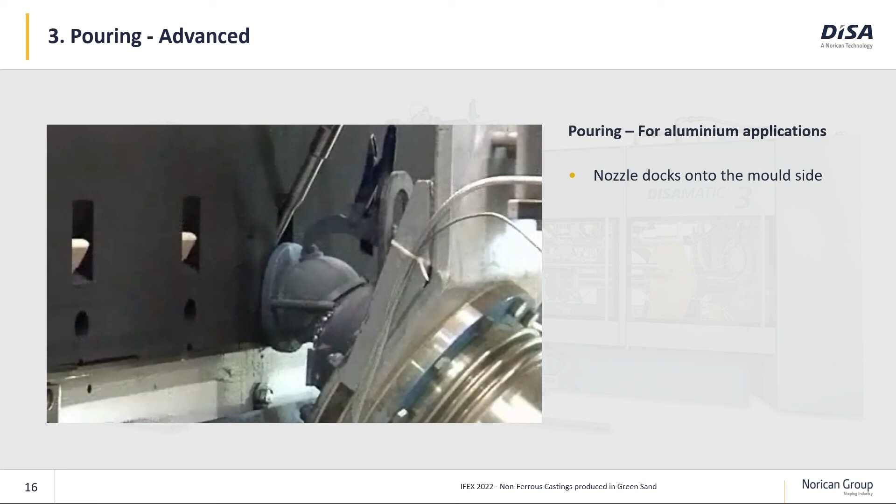To get high productivity, we have a small core closing the runner bar, meaning we can move away from the mold with the pouring device before the metal is solidified. How does that look in real life? Here we see the mold, the nozzle on the pouring device docking to the side of the mold, and these small cores we use to block the runner bar when the mold filling is over. This is how it looks in real life.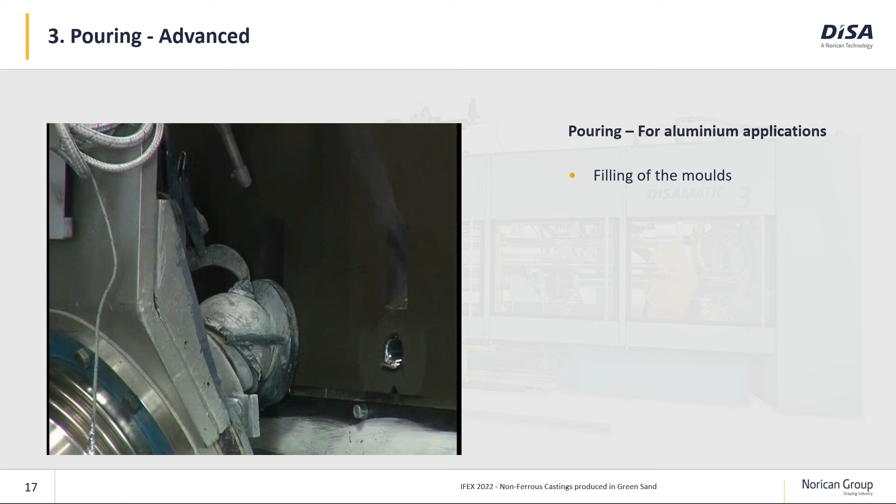We do mold transport, dock to the side of the mold, then gently fill the metal into the mold, and when the mold is completely filled, we close the runner bar with this small pneumatic cylinder pushing the core into the runner bar. We can move away, do mold transport, and then pour the next mold. So even though we have this system, we can still reach quite high production speeds. This means we have no manual interactions in the pouring, so we are not relying any longer on skilled persons pouring the molds, and we can also save personnel in the foundry.

Here we see a picture of a pattern where we see a very simple gating system needed for this system of bottom pouring.

So this was a little bit about the technology that we use to produce aluminum, brass, and bronze castings.

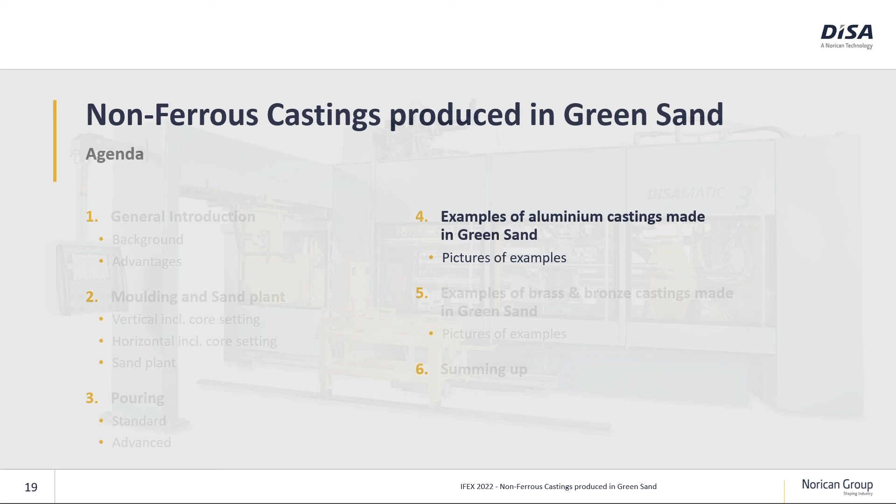Now let's try to look at some examples of castings produced with success today in green sand. First of all, we have to say when we talk about aluminum castings and green sand molding...

Mr., last 3 minutes. 3 minutes, perfect.

When we talk about green sand molding, most of these castings are moved from gravity die or low pressure die. We can say many of these castings can be moved to green sand molding.

If you have any doubt about castings possibly being moved to green sand, please don't hesitate to contact us. We have the DISA team of application engineers that will analyze the parts, and then we can find out together if we can convert these to the green sand process.

So let's look at some examples. Here we have a cord casting, a tank inlet produced in Denmark.

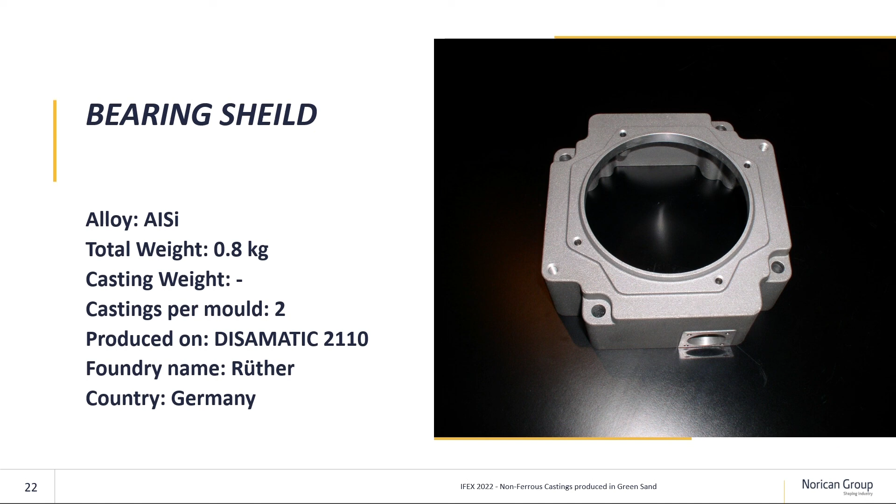A bearing shield produced in Germany, and a ventilator wheel, also produced in Germany, in green sand.

A pneumatic control valve. Now we move into a little more demanding castings. This casting will demand pressure tightness. Here's another casting that will also demand pressure tightness.

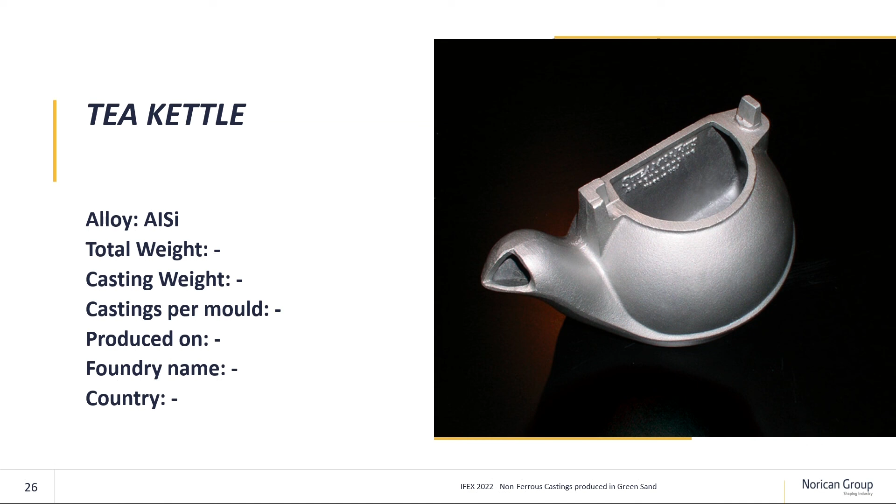We can also do aesthetic castings. If we take a little bit more care about the sand parameters, we can reach super good casting surfaces. So even aesthetic castings can be produced in green sand.

Here we have an example of a hydraulic block where we have requirements for pressure tightness, and we also have requirements for the mechanical properties.

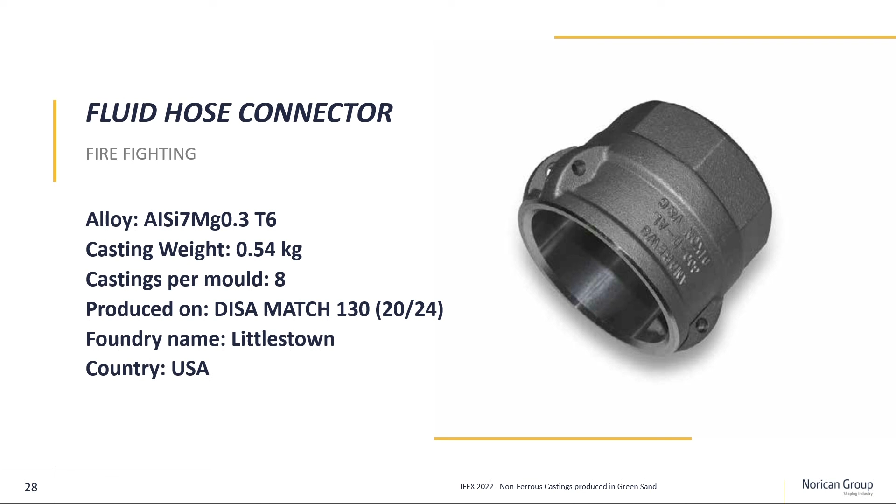A connector for a fire hose, a critical part. Of course, this part cannot break in operation when it's part of a firefighting system.

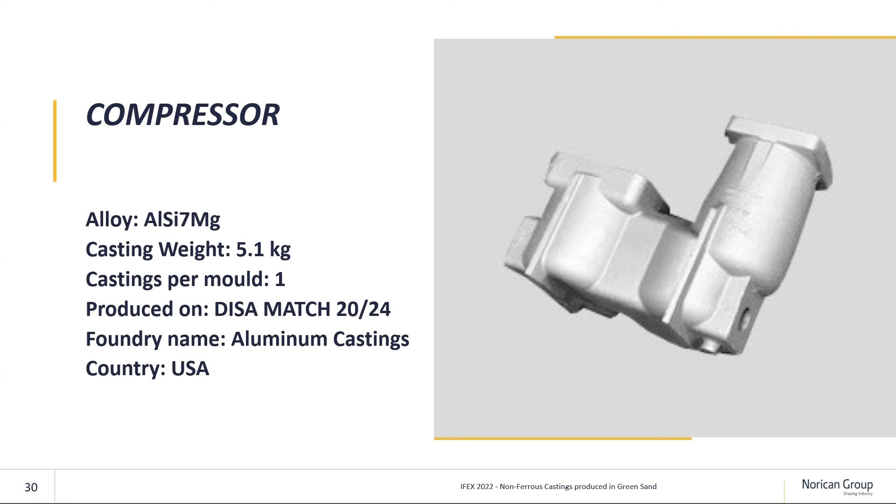A gas valve, also a casting produced successfully in green sand where we need pressure tightness, and a compressor housing. Then some bigger castings - clearly bigger aluminum castings are also being produced successfully in green sand.

Here we have an example of a 10 kilo casting, and another example of a quite big casting.

More complex castings can of course also be produced in green sand, like this heat exchanger.

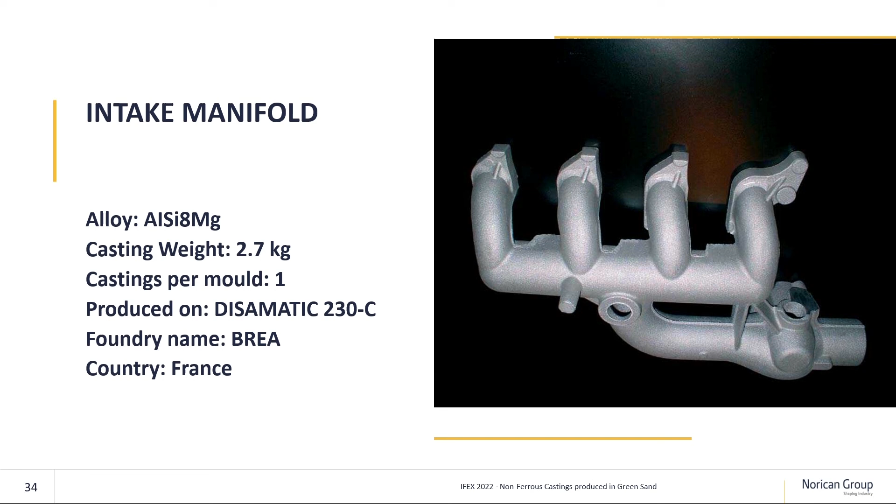Then a manifold. Of course we know that e-vehicles are taking over, but still a lot of ICE vehicles are being produced. For instance, here we have a manifold being produced in 7 million pieces in France with great success.

Transmission housings can also be produced in green sand with great success.

Last but not least, more demanding castings with higher requirements for mechanical properties can also be produced in green sand if that is needed.

So that was aluminum. Let's look at some examples of brass and bronze castings also being produced successfully in green sand. I guess one of the most typical castings will be fittings.

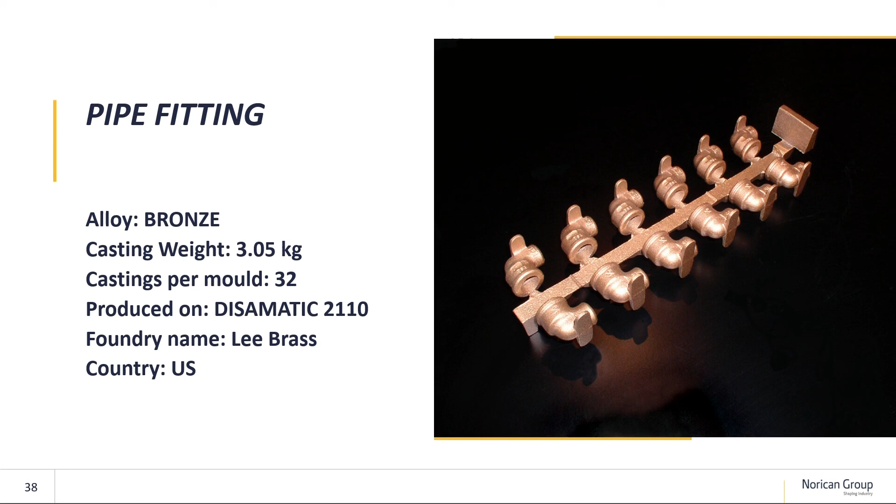A lot of fittings are produced around the world in green sand on Disamatic lines, like this one, produced in the US. Different covers are also produced successfully in green sand all over the world.

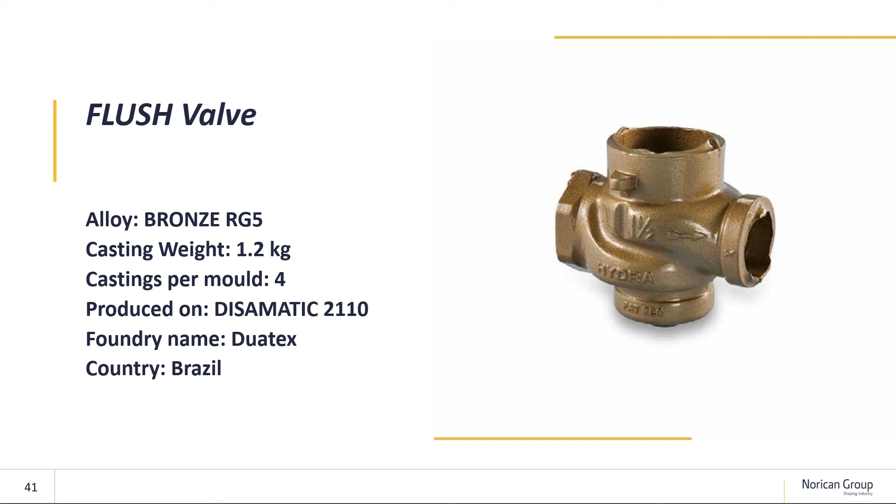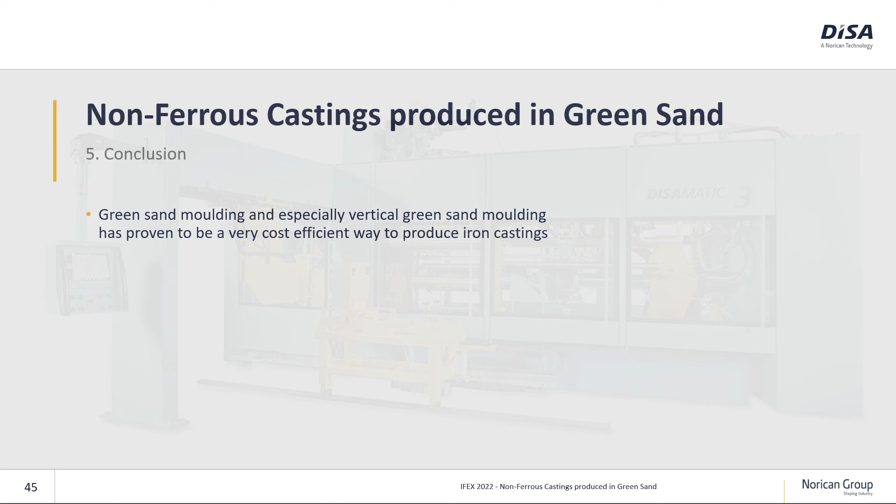So let's move to the conclusion. What we know is that green sand molding, and especially vertical green sand molding, has proven to be a very cost-efficient way to produce iron castings.

I think nobody will argue that. But we can also see that this cost efficiency can be transferred to both production of aluminum castings and brass and bronze castings.

And we have shown that with, I think, quite a number of casting examples shown today from different places around the world. So I think we can say that both aluminum and brass and bronze castings can be feasibly produced in green sand molding.

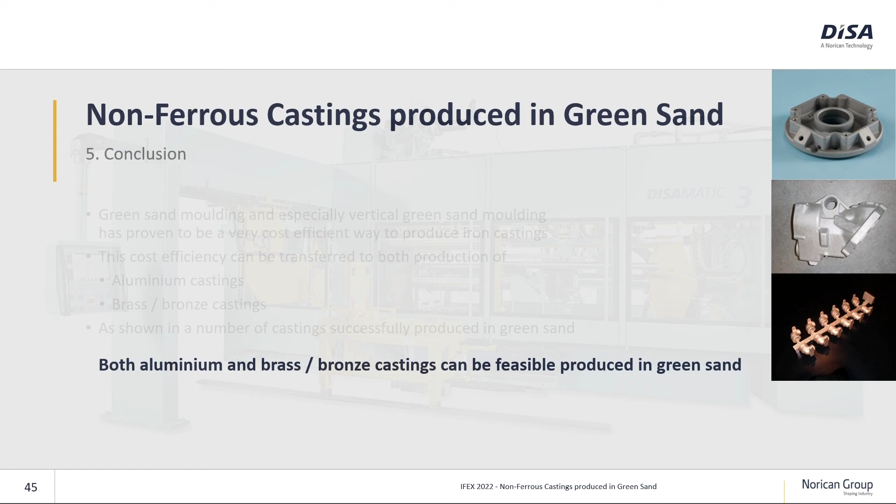And we now have modern molding equipment available that matches these often smaller yearly quantities in which these castings are produced.

So I think with these words, that was the end of my presentation.